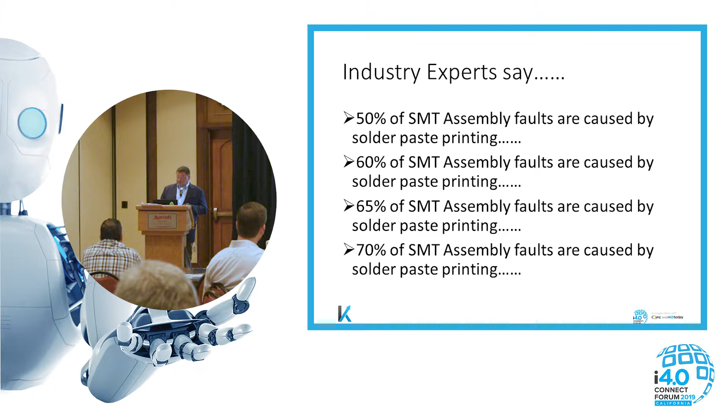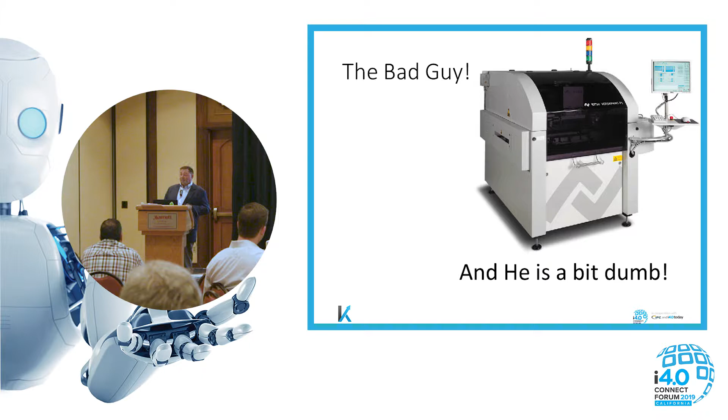The issue that I have with our production lines is some machines are really intelligent. Some machines, like the printers, are a bit dumb. But this guy's responsible for probably 65% of our faults.

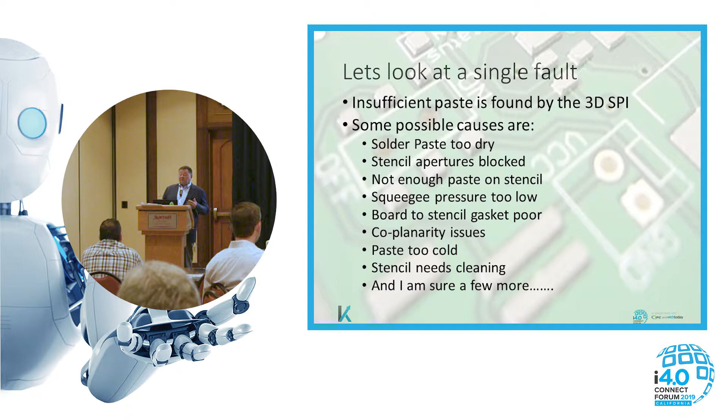And if we look at the basics of i4.0, it's taking automatic feedback to improve production. Feedback in our world at the moment is generally based on algorithms. An algorithm, by definition, has a single result.

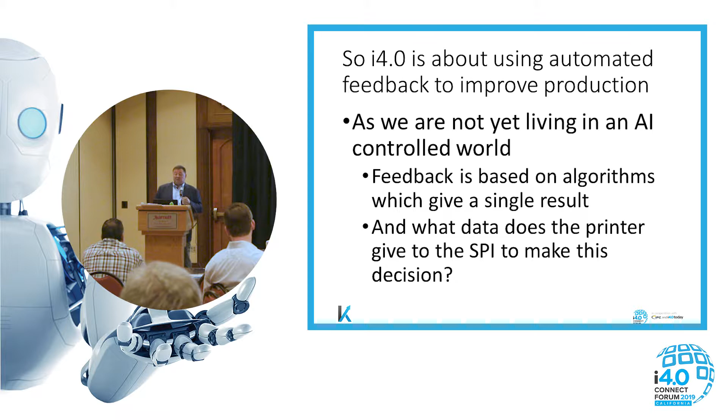So what does the printer give the SPI to make this decision? The gentleman from Koh Young earlier said, okay, 3 parameters: squeegee speed, squeegee pressure, and snap off. Well, some printers you can change your snap off speed, some printers you're stuck with it.

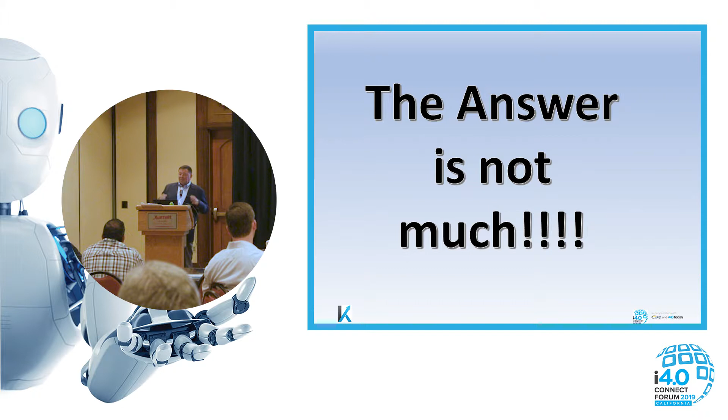I spent 10 years in a business with solder paste, and we always told customers, just use the snap-off speed that we recommend for the paste. Basically, set it up, don't mess with it. The same theory as your reflow oven - if it's there, leave it alone. So really, as a general rule, you probably don't want to be tweaking it.

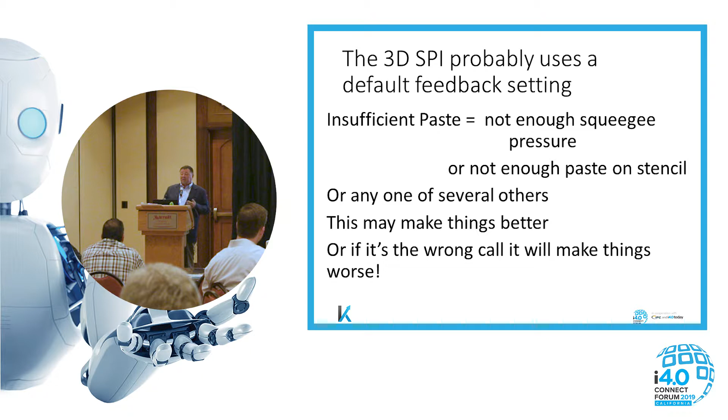So let's say the default algorithm for insufficient paste is not enough squeegee pressure. It might be one of the others. So increasing the squeegee pressure as a result of what you've seen from 3D SPI may make the problem better, or it may actually make the problem worse. And then if it makes it worse, it'll probably go back to doing one other thing that may also not be the one thing that fixes the problem. By then you've probably contaminated the underside of your stencil and you've got a whole load of other problems anyway.

The issue that we have is the data that we get from the printer is very, very minimal. And as the gentleman said previously about measurement, data is the most important feedback that we need. It's a common saying, data is power. You need the data to make the good decisions. The more data you have, the more chance there is of making the right decision. And if you don't have it, you're guessing.

And if you're guessing, you're living in a world that, as production engineers and process engineers, we don't like to live in. So the solution, very simply, is we have to make this guy smarter than he is. We make him smarter, he produces more data. He produces more data, the SPI can produce a more accurate result, and we're more likely to have a situation where the feedback fixes the problem.

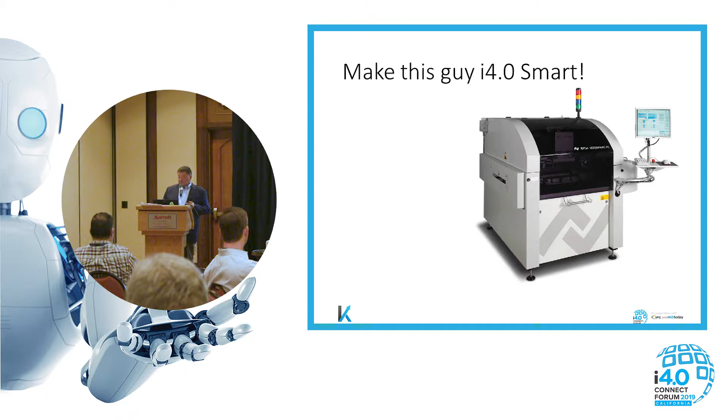So, simple things that we can do well, we can't do them, but as simple things that the people that build the printers can do: weigh the stencil after you printed. If you're worrying about insufficient paste and you know the stencil is the right weight that it should be for the stencil plus paste, you can be pretty sure that that's not the problem.

So you set a minimum and a maximum limit, and that's going to tell you too little paste or too much paste. Both of them can cause different problems, but I'm not going to speculate as to which one's worse than the other one, because again, if you ask 6 engineers, you'll probably get 6 different answers.

Something else that in my days playing with solder paste that we really suffered from was flux and moisture. Too much flux and the paste slumps. Also, it doesn't roll well. Too little flux and it becomes sticky. It sticks in the apertures. It sticks to the squeegee. It sticks all the places it's not supposed to be.

A lot of flux chemistries that are out there are hygroscopic. That means they pull water in from the environment. So over time, they become more wet than they were when you started using them. And the paste will perform differently depending on the amount of moisture that's with it.

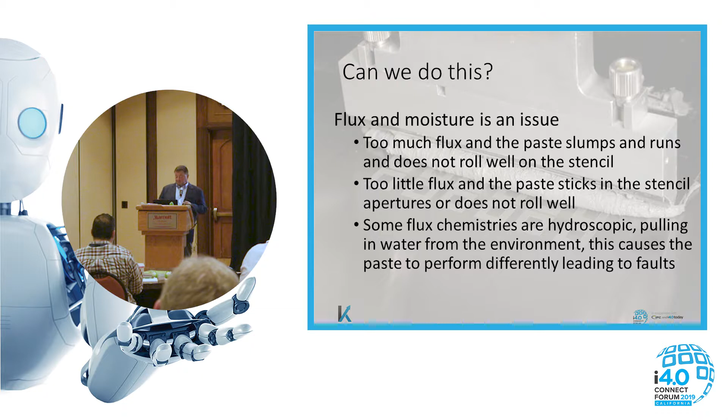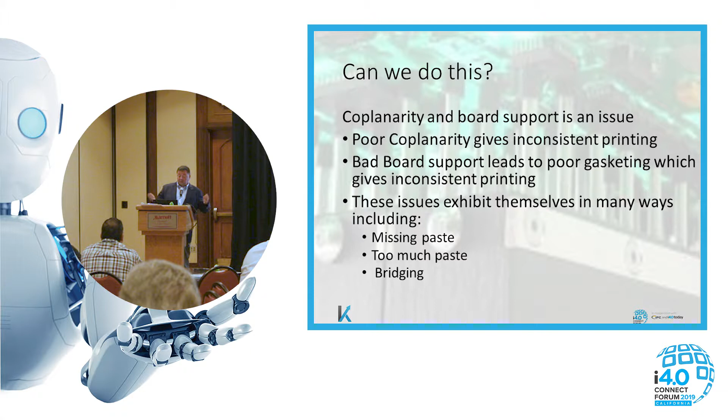Another issue, coplanarity and board support. Coplanarity obviously gives you inconsistent printing because the two things aren't parallel to each other. It's basic. And again, poor board support, poor gasketing, missing paste, too much paste, bridging. I even missed underside stencil contamination off this one because there are so many things that you can do wrong and so many things that you have a problem with.

Some enlightened companies and the more, let's say, the more expensive printers, they're in a temperature and humidity controlled cabinet. So basically you have your own little mini environment that your solder paste is running in. This helps because the consistent temperature of the paste means that you have consistent rheology, and the humidity control means that you don't get too much moisture sucked into your paste.

I'm actually a fan of the fully enclosed print heads, the Rheo Pump, the ProFlow, and now there are some third-party ones out there as well. The reason why I like them is they keep the solder paste completely contained, and they keep a constant pressure on the solder paste as it's going over the stencil. So these are, for me, a step in the right direction because they take away some of the variables. And the more variables you can get rid of, the more consistency you have.

But we've still got a long way to go, and please remember, I'm just looking at and talking about the printer. So, if we wanted to, what could we sense?

As the gentleman said before, sensors are the important things. Sensors give us the feedback, sensors give us the data, and bottom line, sensors tell us what the hell's going on with our production line. If you don't have enough sensors, you don't have enough data. You don't have enough data, you can't make informed decisions. You can't make informed decisions, you can't get things right because we're living in that world of guessing.

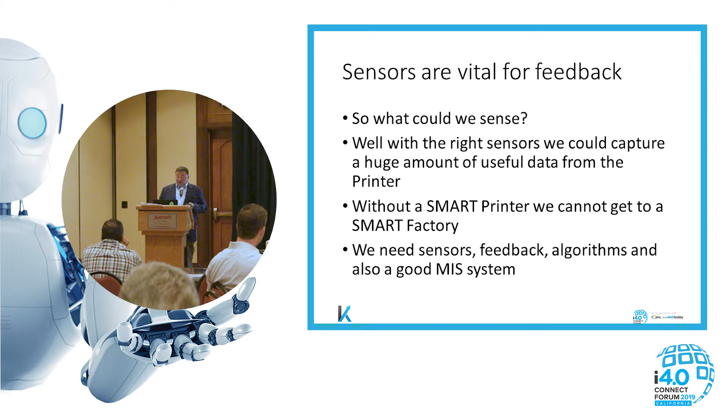So, very simple, if the printer's dumb, your production line's dumb. If you can make your printer smart, you're a step towards smart factory. So we need good algorithms, we need a good management information system to control all of this data when we've got it. Possibly at some time we also need the help of AI to make some of the decisions, but we definitely need to start with the basics.

And like I said, when I've just talked about the bad news until now, the good news and the good side of this is that printing generally is always the fastest part of the SMT line. That means that there's time to do stuff. If the printer was the bottleneck, you don't want to slow down the printer because you'll slow down your line. Because printers are very, very rarely a bottleneck in even the really fast consumer production lines, then there's chance to do something.

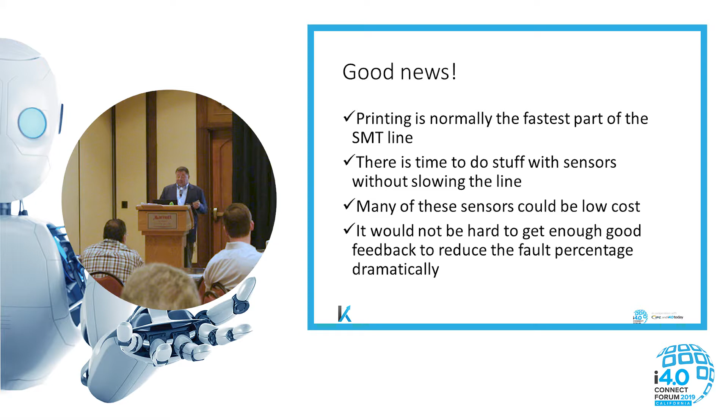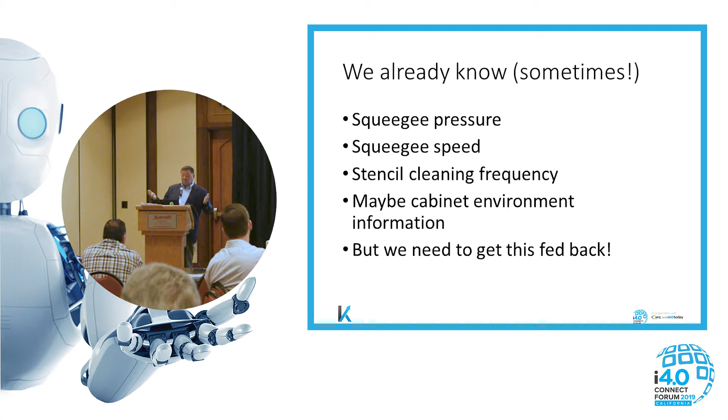And it's not really hard to get some of the feedback that I'm talking about. We already know maybe cabinet environment, squeegee pressure, squeegee speed, stencil cleaning frequency. We've talked about snap-off, so I'll leave that one there.

Volatiles evaporate easily from the paste. We all know this. Moisture gets sucked in instead of the volatiles, so you're replacing the active components with an inactive component, and they're both wet. It doesn't matter, you have too much of one, not enough of the other, you're going to get bad prints.

Now, there's a lot of sensors out there that people use predominantly in their pot plants. They measure moisture and they measure pH. You simply push them into the soil and you get a reading. Now, the pH of paste changes as the volatiles leave, so you can probe the paste every 10 cycles with a simple little $2 probe, and it's going to tell you moisture, and it's going to tell you pH, which tells you whether your paste is within the acceptable parameters or not. So you have a $2 sensor every 10 prints, giving you good, accurate, dynamic feedback.

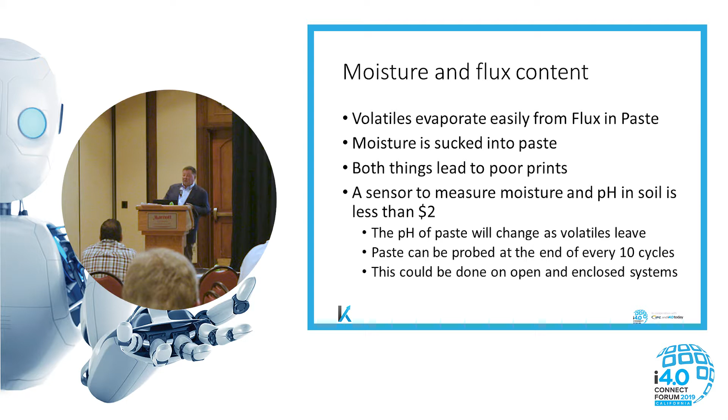We talked about paste volume coplanarity. Put a piezo load cell on each corner of the stencil frame, and you're going to get stencil paste weight, because total weight less the weight of the stencil equals the weight of the paste. You have a maximum and a minimum set. Very simple. You get stencil pressure real-time feedback while it's actually printing. This is going to tell you if the stencil's damaged, the squeegee's damaged, something's come loose in the machine, all of these things. It's going to tell you about stencil coplanarity, and it's going to tell you if there's a problem with your board support, because the pressure will vary as the stencil drops.

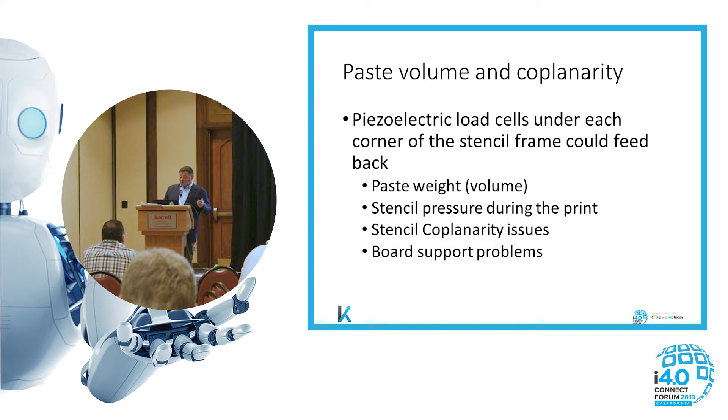It'll also tell you whether the stencil frame is worn, whether the stencil's warped. A change in tension will give you stencil damage. Warped frames give bad results. All of these are real problems that any process engineers in the audience will be nodding their head at, because we all live with these things.

Put a scanning camera underneath the stencil. Just get it to check a few of the key areas against, let's say, a golden image. Very simple to do. And you clean the stencil when you need to clean it. You don't set up to clean the stencil every 10 prints, every 6 prints, or whatever. You set up to clean the stencil when you need to clean the stencil. So not only does this save you time, it saves you materials, it saves you a whole load of stuff, and it ensures that you clean the stencil when it needs cleaning, not every so many sections.

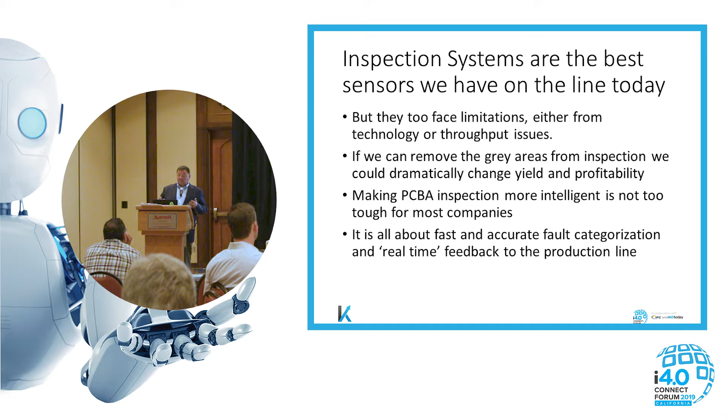So we've looked at all the bad stuff. Part of the production line already has a huge number of sensors on it, and that's inspection. Doesn't matter whether it's SPI, 2D AOI, or even better, 3D AOI, or we also look at AXI. This is where all the data is currently being found. These are the machines that would normally be feeding back to the production machines on the production line about the things that are wrong. So the problem we've got is getting the machines to work together and basically making them more intelligent than they currently are, because whether it's AXI or AOI, they all have issues, capability problems, and limitations.

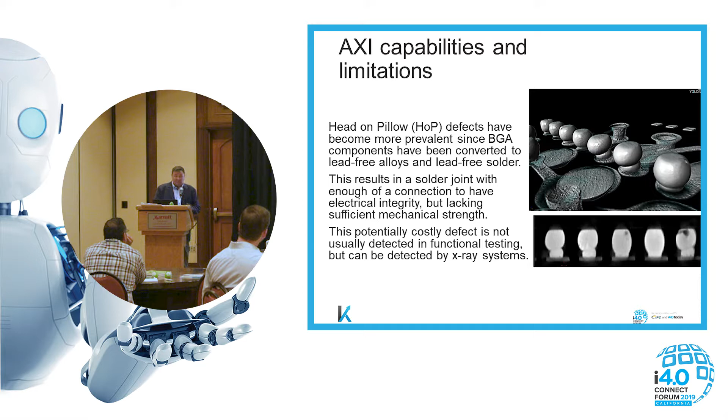Some good pictures, first of all, for anyone who's not sure what head-on-pillow is. If you look at it in a cross-section, you're looking here, and this is an inverted image, so white is black, black is white, and what you're seeing here are actually voids within the system. But obviously this isn't created from an inline system, because an inline system generally works in a different way. It has to find head-on-pillow fairly quickly, because these machines are sometimes the limiter in the production line. You don't want the machine spending longer than it absolutely has to doing its inspection, because if it's the limit on the line, then you slow this machine down, you slow down the line, you slow down your production.

Now, an inline system works fairly simply. It takes a series of slices across the board. We have it taking 3 slices here. Now, depending on the result of those slices, it makes assumptions.

Anybody who lives in the real world and uses AXI is aware of two words that bring fear into every quality manager's heart: false calls, and the one that really scares them is escapes. A false call is a good board that possibly gets flagged up as a bad board, but an escape is a bad board that gets out. That's the real killer, and people set up their machines to minimize escapes, which increases false calls, because it's a balance. If you swing this way, you're gonna stop a lot of boards that are good, and if you swing that way, you're gonna let out some boards that are bad.

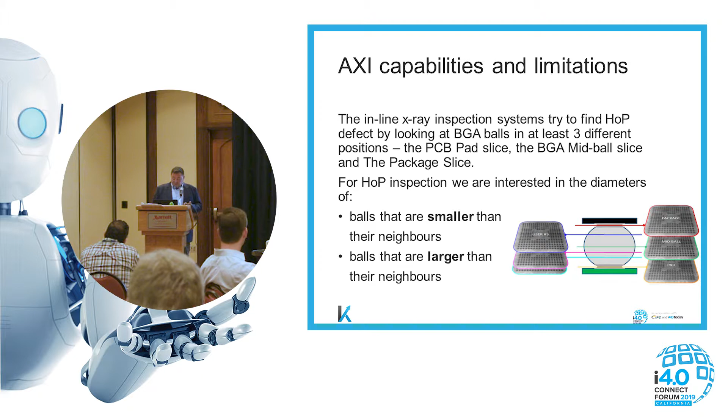Generally everybody sets their systems up to do this. Based on the measurements, they make an assumption that it's an open circuit. So they say okay, the ball is small, the ball is round, therefore the ball has not reflowed. That's what they have to do because they're taking three measurements. It's a big leap, especially now we live in the world of lead-free, because the balls in lead-free don't collapse as much as the tin lead balls used to. So we're making an assumption: if the ball is smaller than this and rounder than that, it's an open circuit, and we'll set those limits to make sure nothing escapes.

Just to give you an idea how the system looks, this is indicating a head-on pillow. You can see this ball - it looks just a little bit different to its neighbors. It's not hugely different, but it's just that little bit different as we go through the pictures. That's the difference when you're looking at a system without perfect magnification and without the time to really inspect what's going on.

Now if you look at this image, I don't need the pointer because I've put nice red arrows on this for anybody who couldn't work it out. Anybody not see the difference between the ball on the left with the red arrow and its brothers and sisters around it? No? Everybody see the difference? Okay, then you're all offline X-ray inspectors now, because that's basically all you need to do.

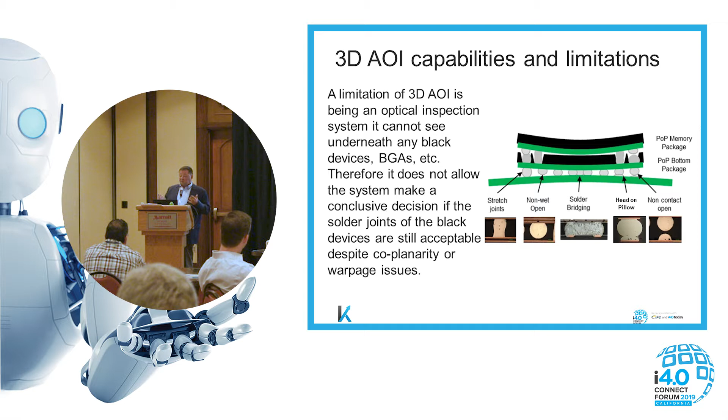And again, this is just a generic.

Invariably, they end up stuck to solder paste, which you then put down components onto. It's called the law of Murphy for anybody who's not a process engineer, because every process engineer is well aware of the law of Murphy. Effectively, this component is not flat because it's lifted, and as you can see, the balls and the pads don't line up very well. So yeah, it's going to be a nightmare.

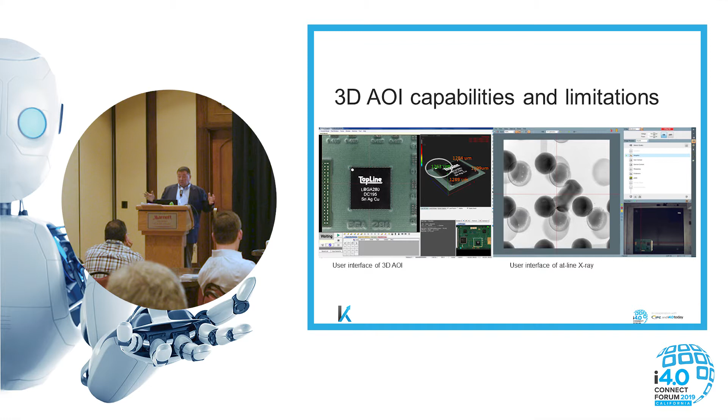But the AOI system will just tell you that it's warped, or a coplanarity problem is wrong. So by putting the two systems together, you can actually come up with something that takes data from the sensors, makes use of it, and actually makes an informed decision about whether that board is good or bad.

We all live in a world of statistical process control. We live in a world of needing to improve yields, improve production, improve first-time pass rates. If you don't know the reason for the failure, you don't know the root cause. If you don't know the root cause, you can't fix it. And if you can't fix it, you can't improve what you're doing.

So what we're doing here is we're using an at-line X-ray system to be the verification machine for the unknowns happening in the production line. This can be AXI, it can be 3D AOI. All you need is to link the machines together so you can shift the data from one machine to another, and then ideally send it to a management information system so the system can see what's going on with the production line.

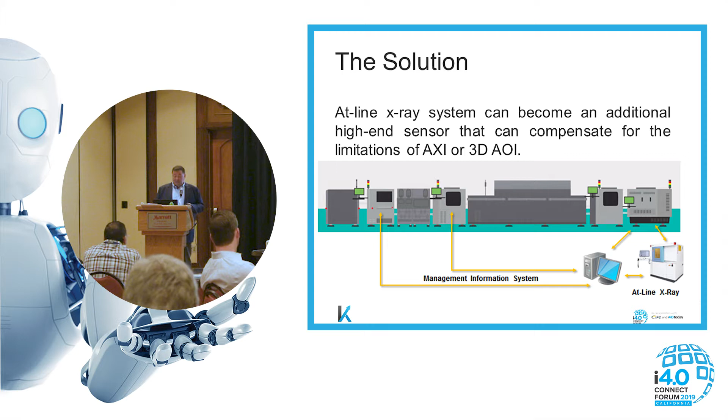The aim being to keep everything happening within the process window, so you might create the occasional defect, but you don't create rejects, and you don't create scrap, and you don't create rework.

Okay, this is a picture of the systems themselves. Please ignore the machines, but effectively, here's your link, and obviously when you've got the data, you can output it in .csv, you can output it as XML, you can send it out as PDFs, you can save the images, and if you're working in an aerospace and military environment, you can store all of this data on your server or in the cloud.

It's all stored by part number, so you get all of the information that you need.

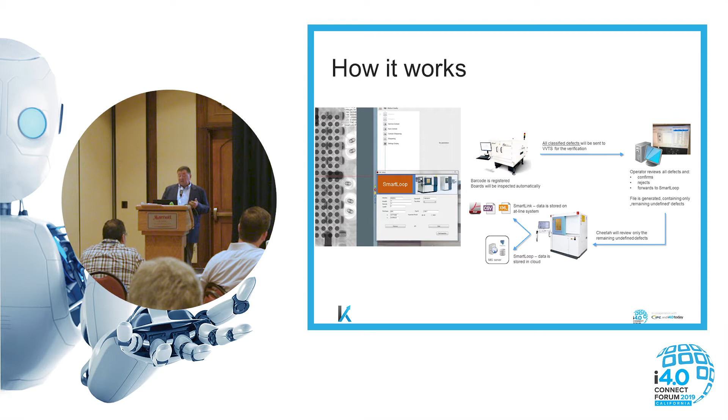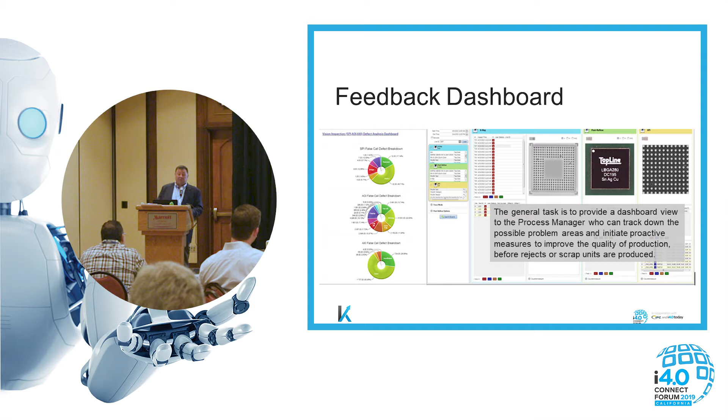So now you're in a situation where inspection and verification time is reduced, because the only other way of dealing with false calls is either throw them away, in-circuit test, function test, all the expensive end-of-line things you have to do, and then you have to accept that possibly a percentage of those are going to be thrown away anyhow.

3D AOI is now a really meaningful tool, because you don't have this issue of, okay, it's warped, but if it's a bottom-terminated component, are the joints good or bad? So there's a benefit.

You still need a technician. We're not in this world of lights-out factory. You still need somebody to look at that dashboard, to look at that management information system and make a decision. But now they have all the data that they need for intelligent feedback and improving the process.

So let's say you've checked 30 boards that are all warped, let's say 40 microns, pull a number out of the air, and all of those boards have good joints underneath them. Now you can change the inspection limit of your 3D AOI machine a little bit wider, because you know at that level they're all good.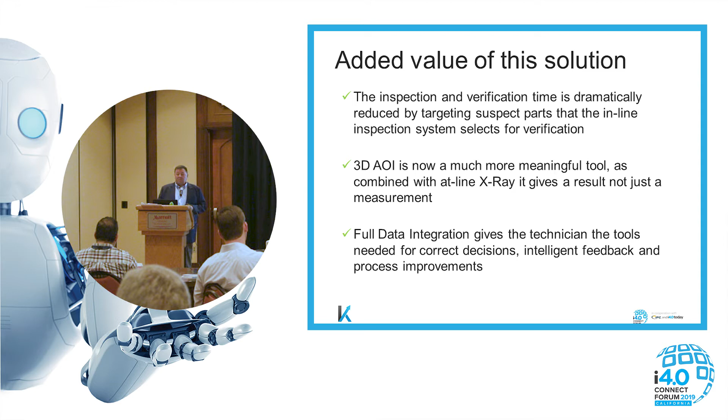So we convinced a couple of customers to go with this. The first thing we did was monitor what was happening on their production lines already. This is always difficult to get customers to do, because you're measuring how much they get wrong. But these guys were up for the whole thing very strongly and were prepared to look at the results and the differences. I have to say, they were a large multinational company, and I applaud them for having the vision.

So generally, the time taken previously for about 10% of their production was 30 minutes a board. Okay, they were big boards. They weren't easy, simple little consumer boards, but even so, that's a lot of time.

By using the closed loop, the pro loop, the smart loop, whatever name you'd like to use, that verification time came down to 4.6 minutes per unit. That's a pretty substantial saving in anybody's book, and that wasn't a cheated number. It included loading the board, pulling up the data, inspecting the board, taking it out, putting it in the good or no-good pile, and all the other stuff that needed doing.

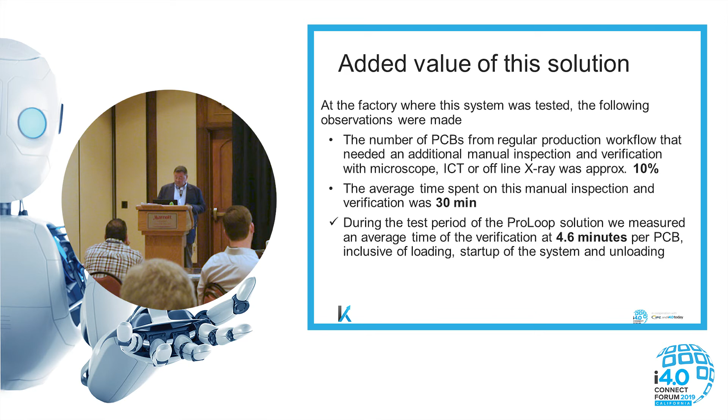So if we look at numbers, and I admit every time you do this you're playing with numbers - I'm not a statistician, so I don't particularly love the ultimate use of statistics - but if you say this system was 6.5 times more effective 85% of the time, and the cost of the rework was saved, okay.

We now assume that the operator using the X-ray machine got 5% wrong. Anybody who's ever driven an X-ray machine knows this is a crazy number - that number is going to be well less than 1%. But let's put 5% in there because it still proves to make a point.

So if we make the assumption that all of the false calls were false calls, then your first time pass yield has gone up from 90% before using the system to 99.5%, and that assumes 1 in 20 boards that the inspector looks at, they get wrong. So in itself, that is a huge saving.

It makes AXI, 3D AOI, a really strong process. It gets rid of false failure calls almost completely - because obviously there are other reasons for these - but anything related to BGA balls, opens, shorts underneath components, things you can't see, basically you can fix with this system.

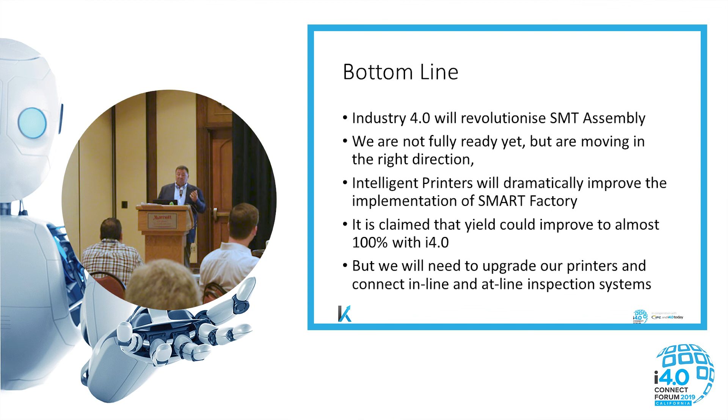But we need to get upgrades on the printers that will give us more data, more information, and then maybe we can start looking at the feedback from the SPI machine that addresses all of the potentials, because the SPI machine, or the management information system connected to it, has more data. At the moment, as an engineer, I'm really glad that the best combination to control everything is a combination of our brain and the algorithms in the brain of the machine.

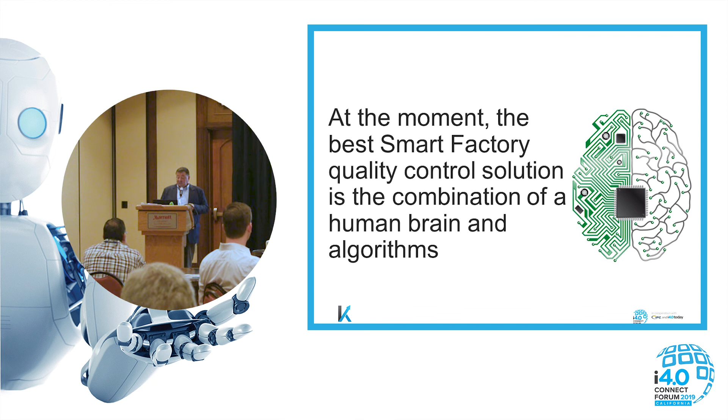No? Okay, that means I was either very bad or very good, so I'm going to assume I was very good, and thank you all for being a good audience.